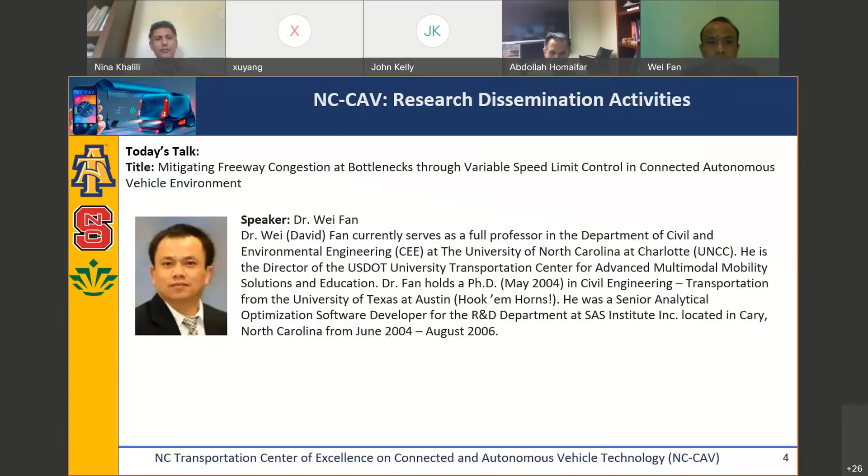He was a senior analytical optimization software developer for R&D at SAS Institute in Cary from June 2004 until August 2006. And also, Dr. Wei Fan is the lead for Thrust 2 of the NCCAV Center. And with that, I would like to invite Dr. Wei Fan to give today's talk.

Thank you. So, good afternoon, everyone. It's great to be with you, and I'm going to make a presentation entitled Mitigating Freeway Congestion at Bottlenecks Through Variable Speed Limit Control in Connected Autonomous Vehicle Environment. So this is one of the research projects we conducted for the U.S. Department of Transportation, CAMMSE UTC, about 2 or 3 years back. We spent quite some time, about 2 or 3 years, on this study. There are a lot of results we may not be able to share with you. About half of them you're going to see today.

Okay. So here is the overview of my presentation. Still loading. Ali, can you see this? It's advanced to the next slide. You do see the slides. It is still on slide 1, on the cover slide. Okay. So I probably need to close one of them. Close it. So how about now? Yeah, you're on slide 2, correct.

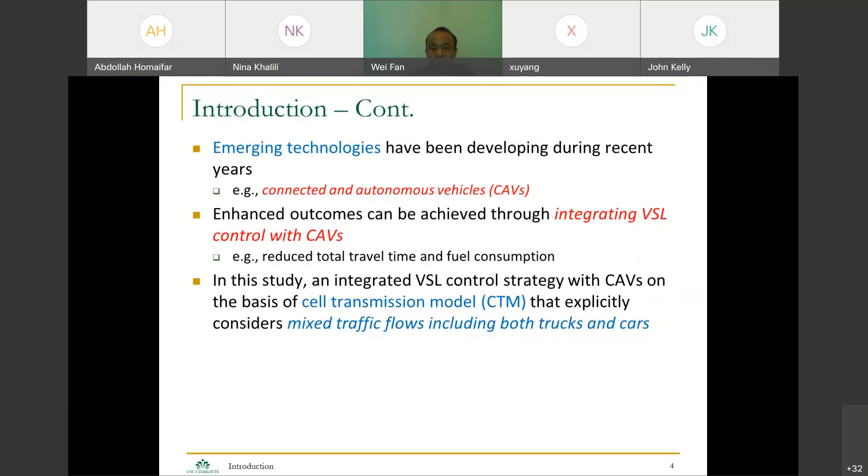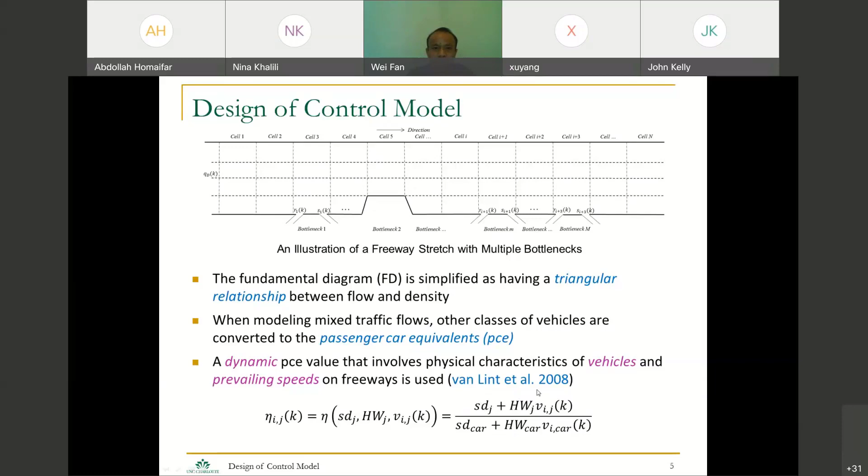So this PCE is calculated as the gross distance gap of vehicle type J divided by the gross distance gap of a car here, as you can see. So if you want to know more, you can refer to this article here, okay? So as we all know, when the demand reaches capacity here, basically these two lines should be discrete in the sense that we have a capacity drop here.

So as we all know, in the traffic flow domain, a lot of researchers, particularly early on at San Diego State University, like Professor James Banks, who retired a few years back, did a lot of research focusing on the capacity drop. So this phenomenon has been verified using the PeMS database in California, as you can see here. So our research can account for that capacity drop explicitly.

And for a fundamental diagram, we could have one fundamental diagram for different vehicle types. So we're going to have a fundamental diagram for different vehicle types and different bottlenecks, and we are going to combine them into one. So this is just trying to show you one example. So obviously there is a lot of work related to CTM, how to model the traffic flows. If you're interested, I will have one reference later on I'm going to share with you, so you're encouraged to read that to get more information.

So to model the connected autonomous vehicle, we use the intelligent driver model, which a lot of people refer to as IDM. IDM was initially developed by Treiber and others back in 2000. The IDM model can be used and adopted to model car following maneuvers.

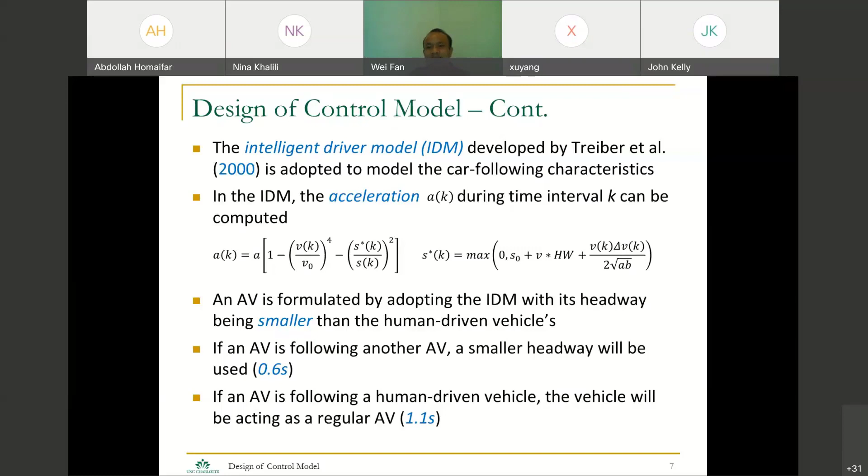In our research, when we model the autonomous vehicle, we basically decrease the headway. For example, when an autonomous vehicle is following another autonomous vehicle, the headway is reduced to 0.6 seconds. When an AV is following a human-driven vehicle, the vehicle acts as a regular AV, which is 1.1 seconds. Later on you will see that in our model calibration for human-driven vehicles, the headway we calibrated is 1.6 seconds, which is much larger. We will have one slide to share with you on that based on the case study later.

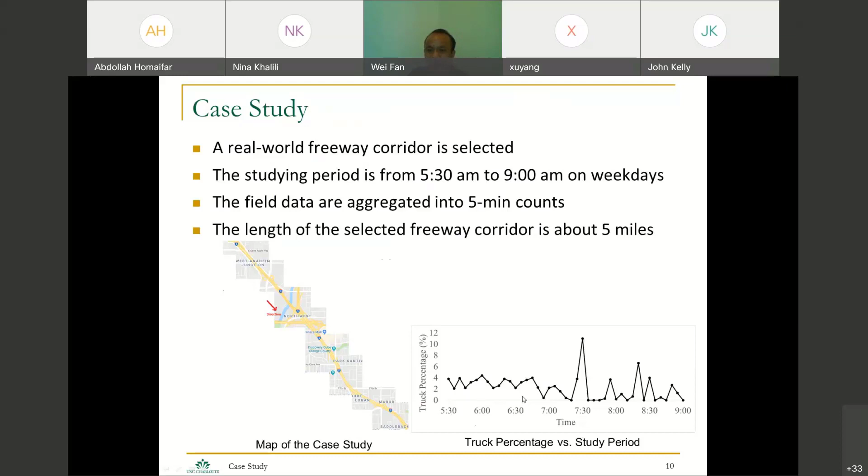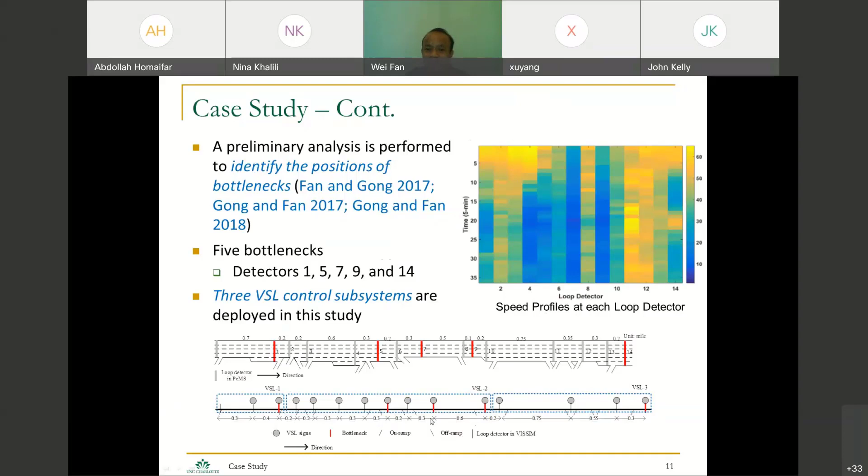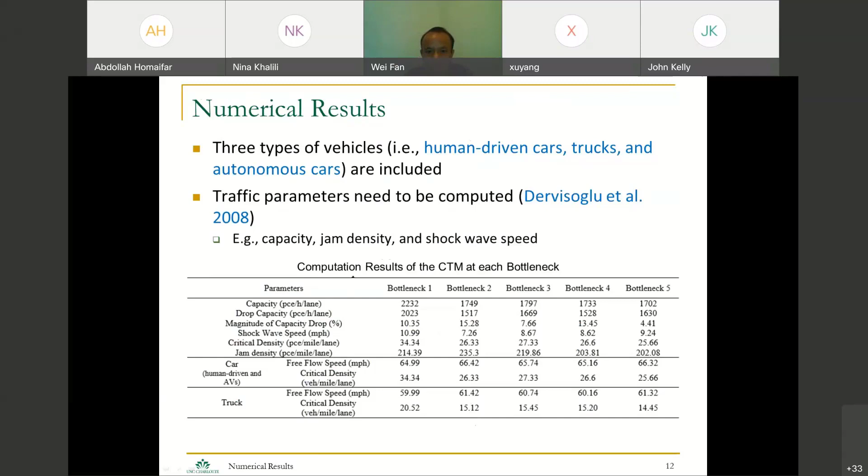And then as we all know, in the transportation field, particularly for the PeMS database, we get real world data. They're ground truth data. On the other hand, we have simulations coming from the software VISSIM. So we always need to conduct model calibrations. For example, in VISSIM, there are several model parameters inherent in that software. So we must conduct calibration so that the data coming from the simulation is really, really close to the real world data, so that we have a certain level of confidence that the results we get out of a simulation are really high quality, right? You can trust those results.

So that's the point. So a couple of the parameters, just to show you as an example. For example, CC0, CC1 in VISSIM. CC0 is the standstill distance. CC1 is the headway time. So based on the PeMS database, we conduct a model calibration based on some of the models we developed in this paper. So we calibrate headway to be 1.6 seconds for human-driven vehicles. That's right now in the real world in the PeMS data, which is true, right? 100% human-driven vehicles.

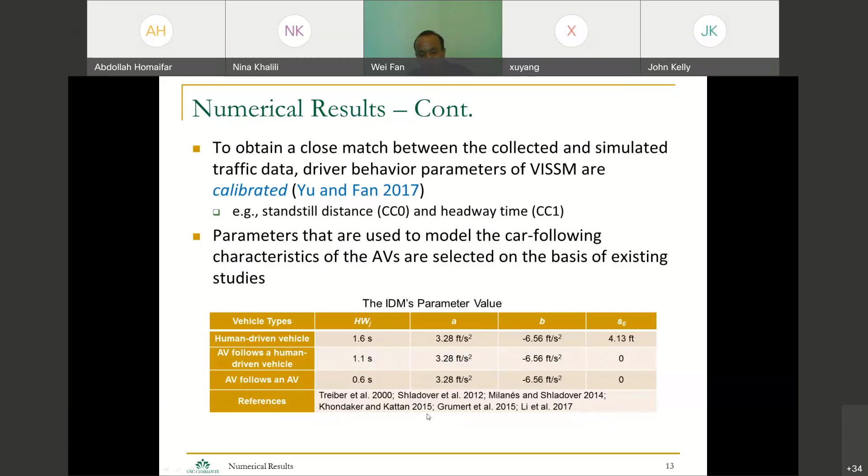So next slide, as you can see, we have 3.5 hours in our VISSIM model. The first 30 minutes we use to warm up the simulation, and then the remaining 3 hours, from 6 to 9, for our simulation. And then the prediction horizon is 5 minutes. We're gonna change the speed limits every minute. The discrete time step is 10 seconds. So what do I mean by these 3 parameters? We're going to make a decision, update the speed limits every minute, but we're going to make a prediction 5 minutes into the future. In other words, we have 5 time steps ahead.

Because we want to make our model and the prediction really reliable into the future. You cannot make a decision based on a myopic short-term view. So we look 5 steps ahead. We make predictions. Based on those predictions, we anticipate how drivers react to different variable speed limits, and we optimize. We have that capability. And then we optimize and display the speed limit. And then the drivers react to the updated speed limit. They make changes. And that's kind of like a rolling horizon. We make decisions on a rolling horizon basis.

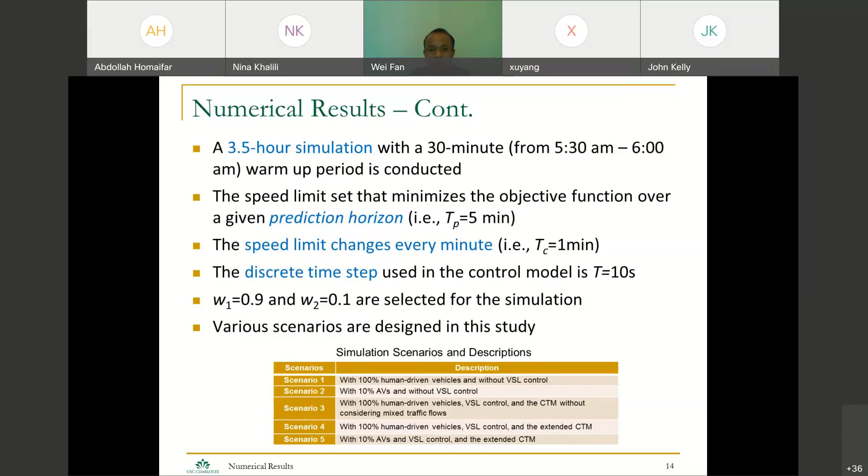So this table basically presents some of the work from the research funding we got back then. For example, scenario 1 means all human-driven vehicles without control. We're going to use that as our base for comparison to show that in other scenarios we improve the results. Total travel time, average delay, average number of stops, and also emissions. As you can see here, scenario 1 is the highest, pretty much across all categories.

Scenario 2, which means 10% AV, but no control. So we got some improvement compared to the baseline. And then 3 and 4, all human-driven vehicles with control, so this is improved significantly. Later on, we have 10% autonomous vehicles with VSL control. This one clearly is the best across all categories.

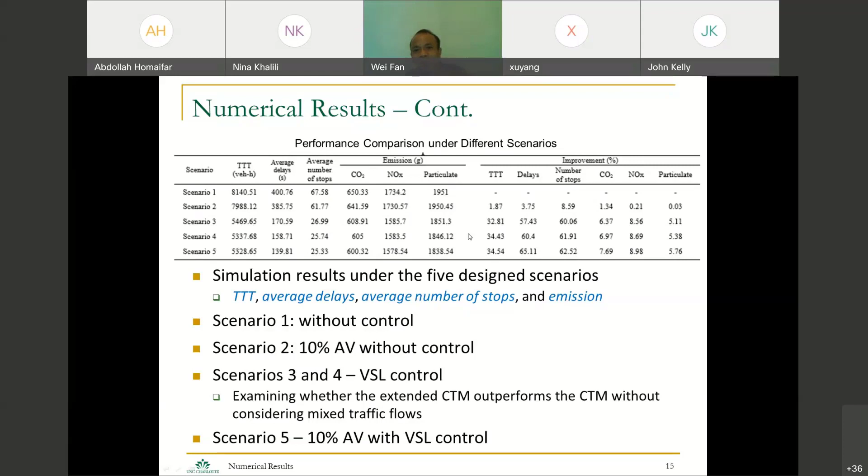So this slide basically shows you the speed harmonization impact of VSL control. This picture shows the speed control map. We have 2 dimensions again here. The x-axis corresponds to the cells, that's the space dimension. The y-axis is time. So if you draw two lines here, horizontally and vertically: horizontally, we fix the time instant, t equal to 140, and then we can see the speed transition between cells.

As you can see, color-wise, we see gradual change, which indicates a smoother transition of speed among roadway segments. And vertically, it's like a cross section. We stand there and look, and over time we also have speed harmonization being achieved as well. So these slides show, at the same time instant, the speed change between cells. And at the end of the simulation, the vehicle speed at the most congested bottleneck clearly begins to recover.

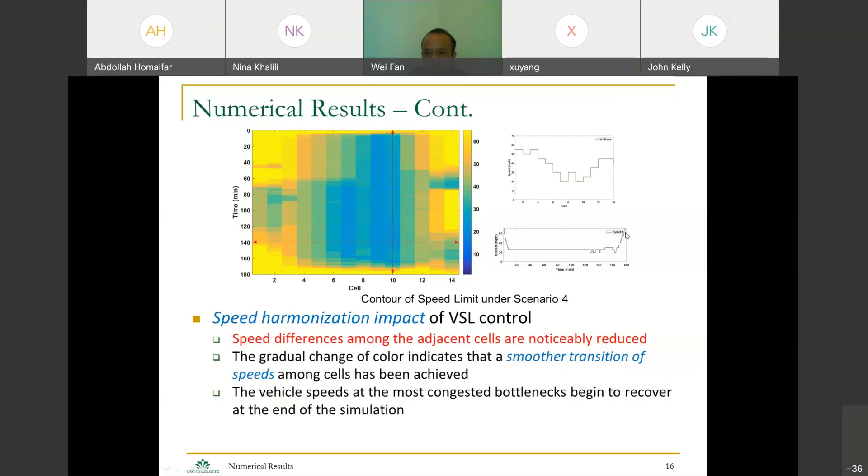And then finally, this slide shows scenarios 1, 4, and 5. Scenario 1 means the real world, all human-driven vehicles and no control. As you can see here, we clearly have a capacity drop and zigzag here. But 4 is all human-driven vehicles, and 5 is 10% AV, both with control. You can see we have a steady and higher discharge value, much higher than the 100% human-driven vehicles without control, clearly at both bottlenecks 2 and 3.

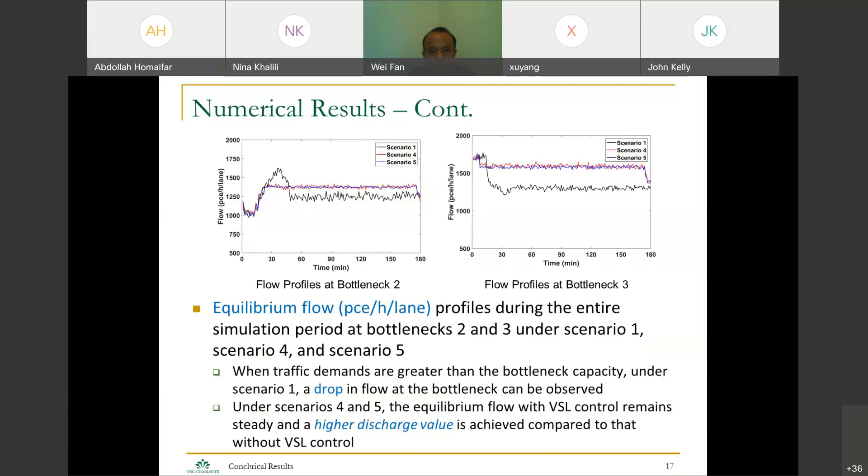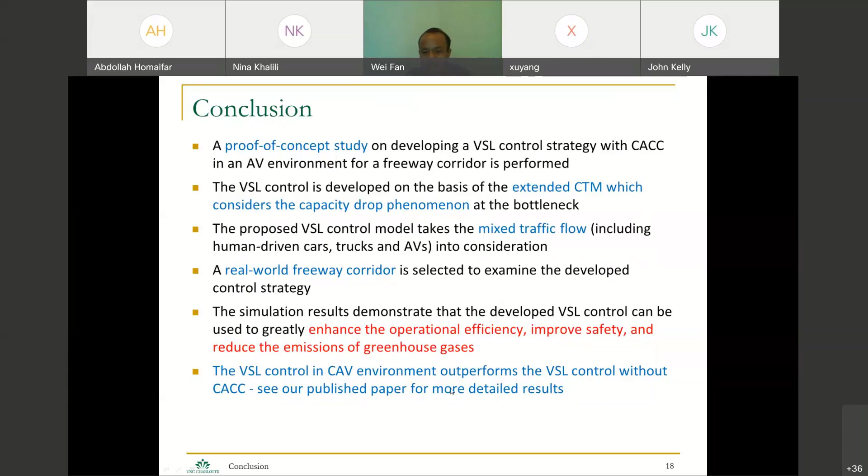So this slide summarizes what we did. We integrated VSL with CAV. We developed the extended cell transmission model, which can consider both the capacity drop and mixed traffic flows. We tested our model using the real-world freeway corridor on I-5 in the Los Angeles area. The results show enhanced efficiency, improved safety, and reduced emissions. We have some other results on CACC, and you can see more in our paper, but due to time constraints I'm not going to talk about it.

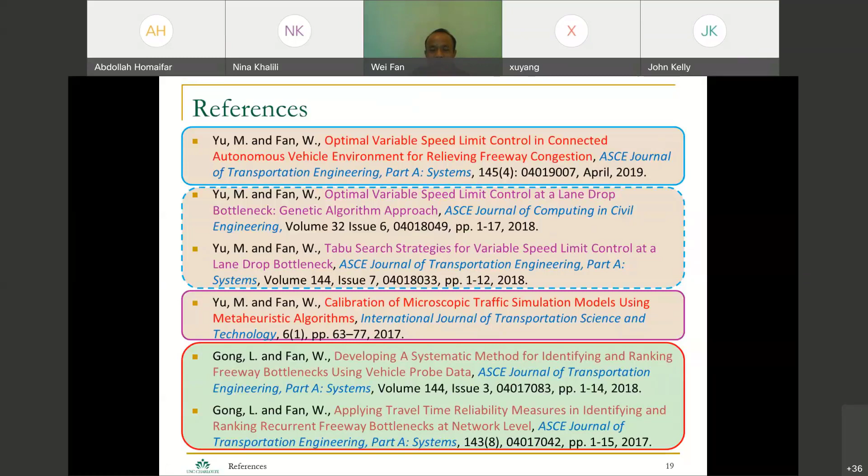And the last 2 are based on the research study we conducted for NCDOT. We used vehicle probe data from INRIX to use travel time reliability measures to identify bottlenecks, rank them, develop countermeasures to improve them, and do cost-benefit analysis and things like that. We have reports based on all these. If you're interested, you're encouraged to Google and find the papers and look at the research reports we published.

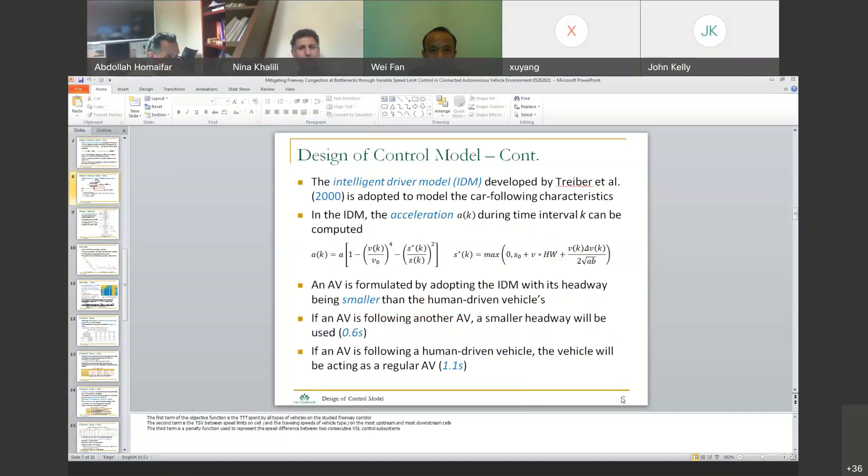Sorry, Ali, I just lost you. I did not hear your question clearly. Can you repeat that again, please? Okay. Maybe I think there is an echo from your side.

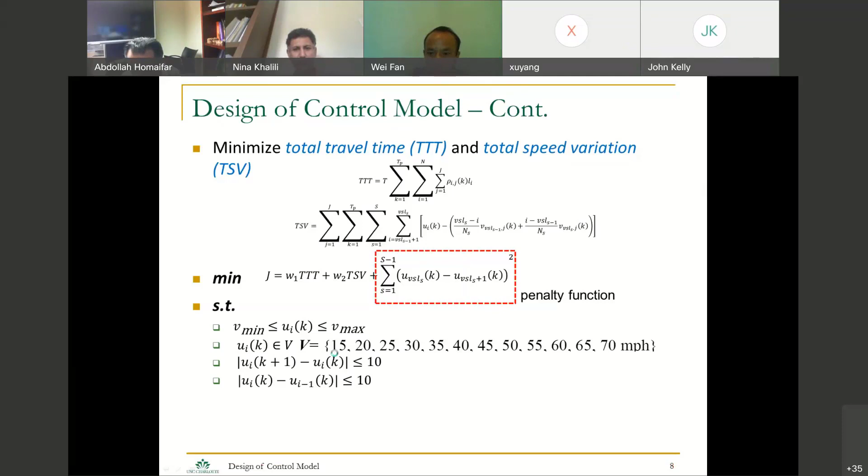And then for different vehicle types, we have different fundamental diagrams. For example, we could have cars and trucks. And then we have ways to combine these two into one. And there are quite some derivations going on behind the scenes. So if you're talking about the fundamental diagram, then that's the way I answer your question.

But if you're asking about these, then there is a lot of derivation involved. So I would encourage you to go look at our papers. Our paper also refers to a bunch of papers. Obviously we did not derive this equation ourselves. We also adopted quite some work from other researchers as well. So did I answer your question? I think, thank you.